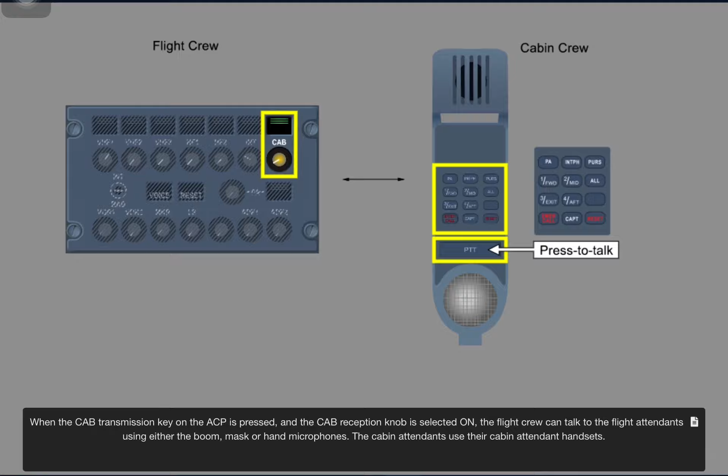The service interphone system allows for communications between the cockpit and cabin stations and the service interphone jacks. There are 7 interphone jack locations on the exterior of the aircraft. On the overhead service interphone panel is a push-button service interphone override switch, normally left in the auto position. This allows the system to be used when the aircraft is on the ground. When the aircraft is raised off its landing gear, the service interphone system may be used if this push button is selected to the on position. The audio lines from the interphone jacks are connected to both CIDS directors.

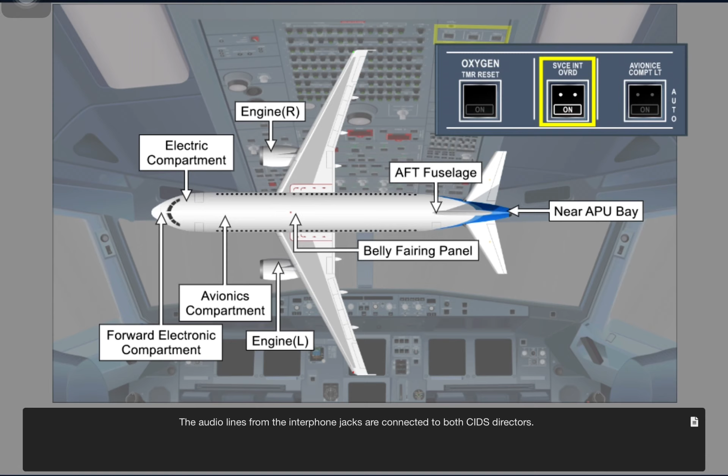The ground mechanic call system allows the flight crew and ground crew to call each other in order to establish communications. The mechanic push button on the overhead CALLS panel is pushed to advise the ground crew that the flight crew wishes to communicate with them. When the push button is pressed and held, the blue cockpit call light on the external power panel illuminates and an external horn sounds. Select the mechanic calls push button. When the push button is released, the horn stops, but the light remains illuminated. The light remains illuminated for 60 seconds, but it can be extinguished at any time by the reset button on the external power panel.

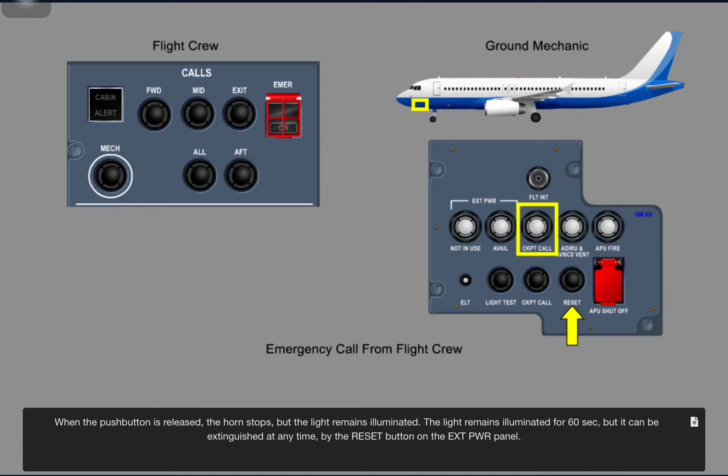The cockpit call push button on the external power panel, when pressed, sounds a buzzer on the flight deck, and the mechanic light on the ACP flashes amber. When the push button is released, the buzzer stops, but the mechanic light on the ACP remains illuminated for 60 seconds. The flight crew can extinguish the light using the reset push button on the ACP.

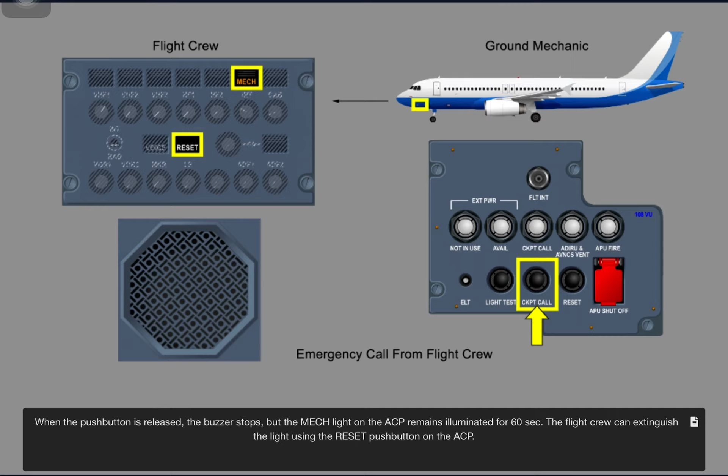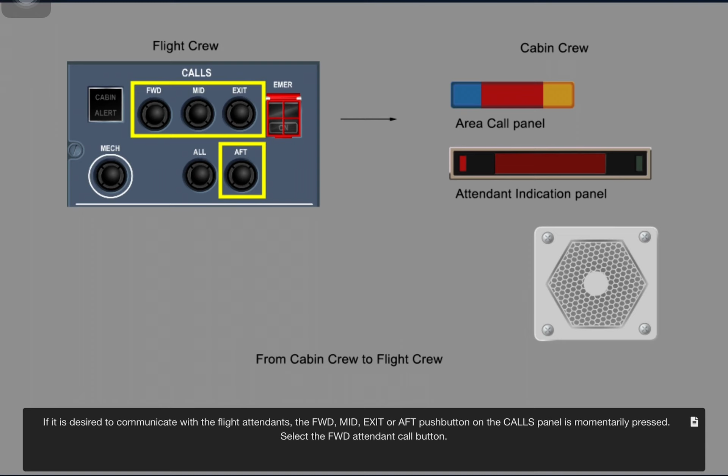The cabin call system allows the flight crew and the cabin crew to call each other in order to establish communications. If it is desired to communicate with the flight attendants, the forward, mid, exit, or aft push button on the calls panel is momentarily pressed. Select the forward attendant call button. A red light comes on at the corresponding cabin area call panel. Captain call and a green light comes on at the attendant indication panel, and a high-low chime sounds through the area loudspeaker. The flight attendant then picks up one of the handsets to respond.

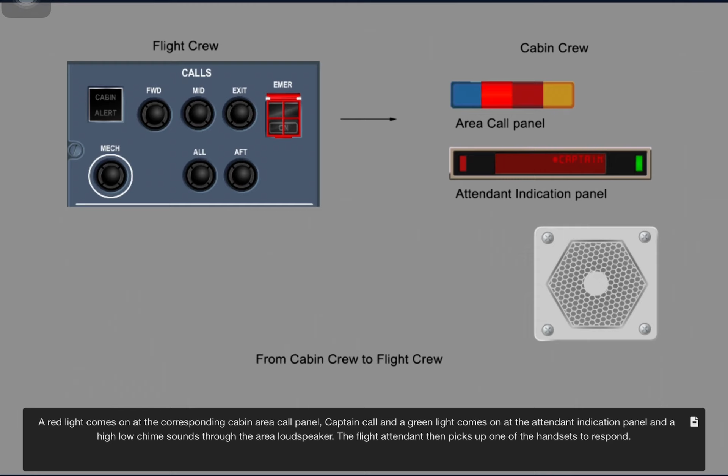When a flight attendant wishes to call the flight deck, the captain push button on the handset is momentarily pressed. Select the captain push button on the flight attendant handset to call the cockpit. In the cockpit, the attendant light will flash amber on the ACPs and a buzzer will sound. Note, the buzzer is inhibited during takeoff and landing. The light will flash for 60 seconds or until the reset push button is pressed on any ACP. To respond, the flight crew can press the attendant transmission key and select the cabin reception knob on the ACP. In the cabin, the captain message will appear on the attendant indication panel, AIP, for which the captain key was pressed.

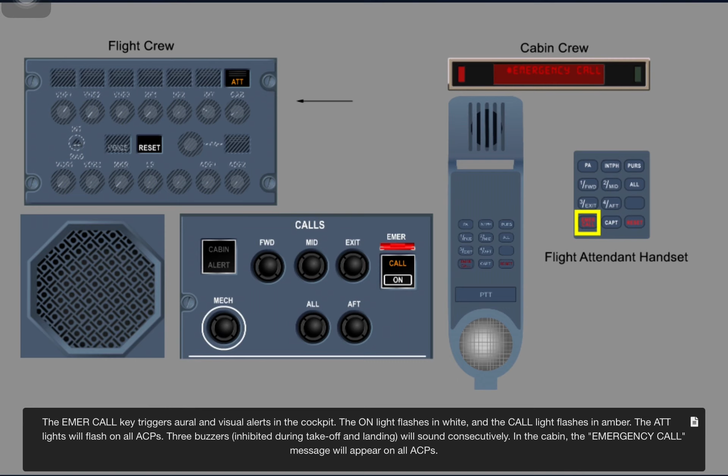The emergency call key triggers aural and visual alerts in the cockpit. The on light flashes in white, and the call light flashes in amber. The attendant lights will flash on all ACPs. 3 buzzers, inhibited during takeoff and landing, will sound consecutively. In the cabin, the emergency call message will appear on all ACPs.

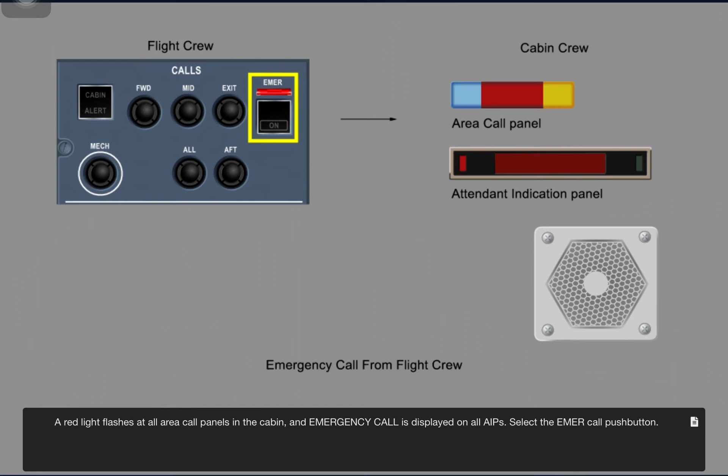When the emergency push button on the overhead panel is momentarily pressed, the call light will flash amber and the on light will flash white. 3 high-low chimes are heard through the cabin loudspeakers. A red light flashes at all area call panels in the cabin, and emergency call is displayed on all AIPs. Select the emergency call push button.

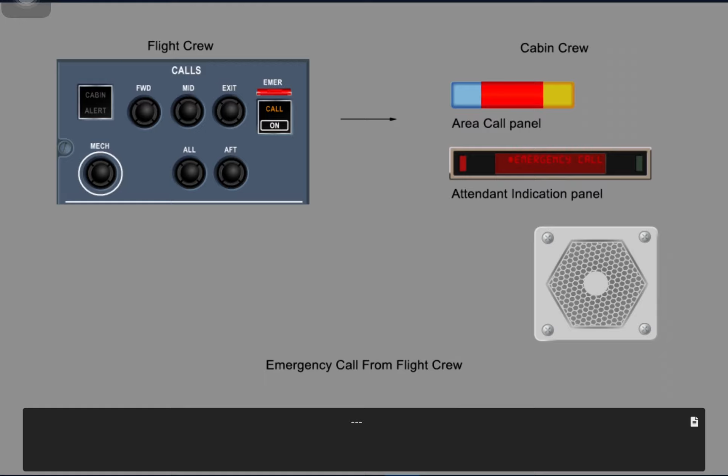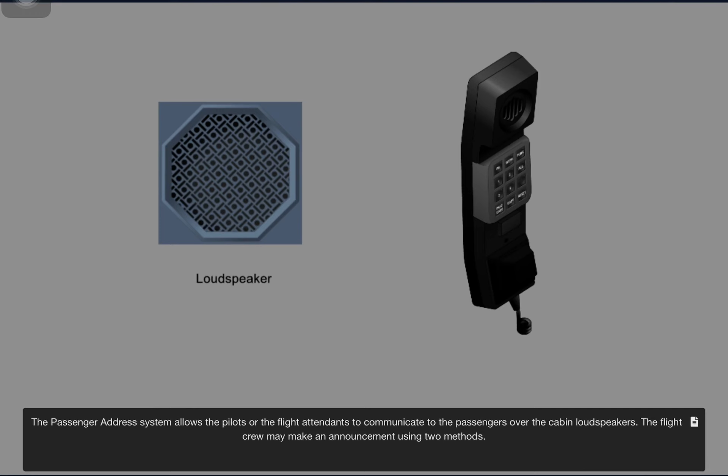The passenger address system allows the pilots or the flight attendants to communicate to the passengers over the cabin loudspeakers. The flight crew may make an announcement using two methods. The first method is to use the cockpit handset located on the end of the center pedestal. It is removed from its cradle, and the press to talk button is held in while the announcement is made.

The second method is to use a boom, mask, or hand microphone with the ACP. The PA reception knob is pressed on, the volume is adjusted, then the PA transmission key is pressed and held while the announcement is made. Select the PA reception knob and the PA transmission key to make an announcement.

Note that the PA in-use light is illuminated green when the PA is activated from the cockpit or cabin, when the videotape reproducer, VTR, is running, or when the video server is running.

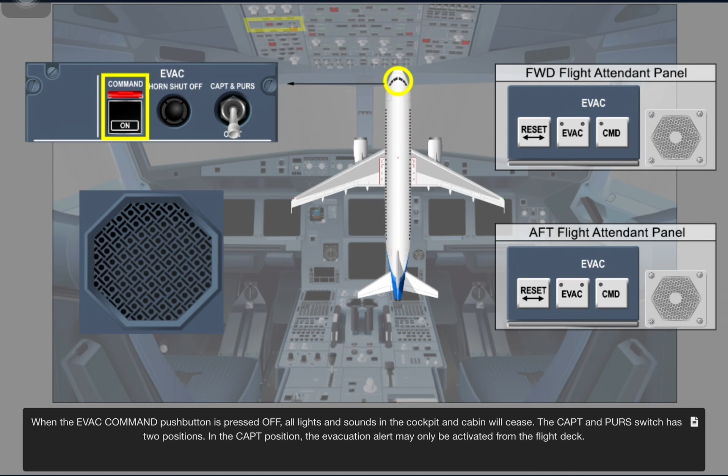When the guarded evacuation command push button on the overhead emergency evacuation panel is pressed and released, the on light comes on, the evacuation light flashes red, and an evacuation horn sounds in the cockpit. In the cabin, the evacuation horn sounds, and the evacuation lights at the forward and aft flight attendant panels flash. Pressing the horn shut-off button silences the horn in the cockpit only. When the evacuation command push button is pressed off, all lights and sounds in the cockpit and cabin will cease.

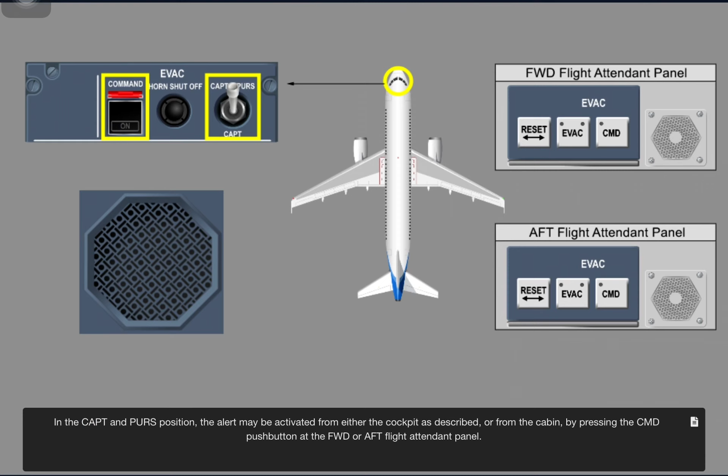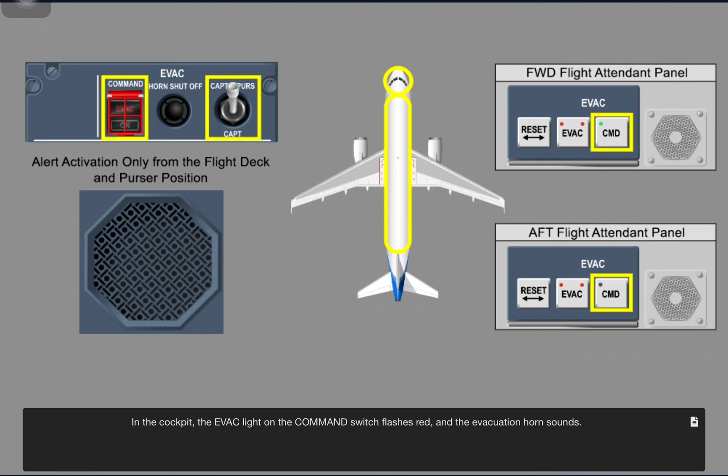The captain and purser switch has two positions. In the captain position, the evacuation alert may only be activated from the flight deck. If a cabin evacuation push button is pressed, the cockpit horn will sound for 3 seconds. In the captain and purser position, the alert may be activated from either the cockpit as described or from the cabin by pressing the command push button at the forward or aft flight attendant panel. In the cockpit, the evacuation light on the command switch flashes red and the evacuation horn sounds.

In this lesson, we have discussed the Audio Management System, Cabin Intercommunication Data System, CIDS, controls, interphone system, call systems, passenger address systems, and the emergency evacuation system.